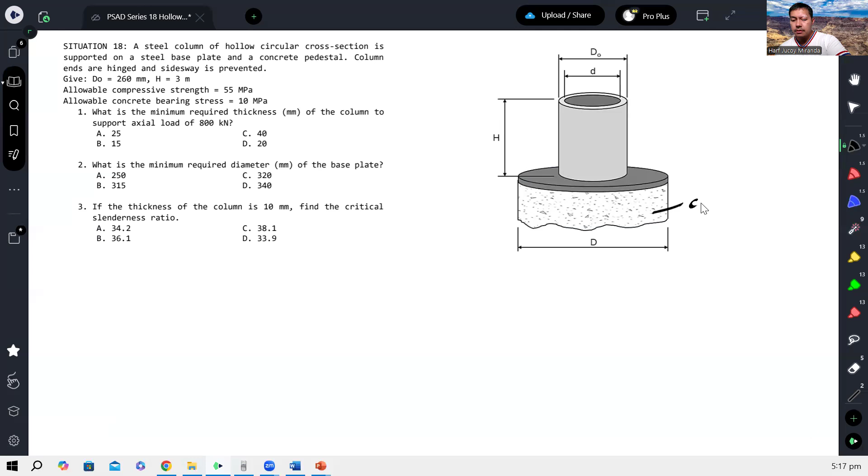Now, as you can see in the figure, it turns out this is the base plate, nakapatong siya sa concrete pedestal. Nasa concrete ito. And ito yung base plate.

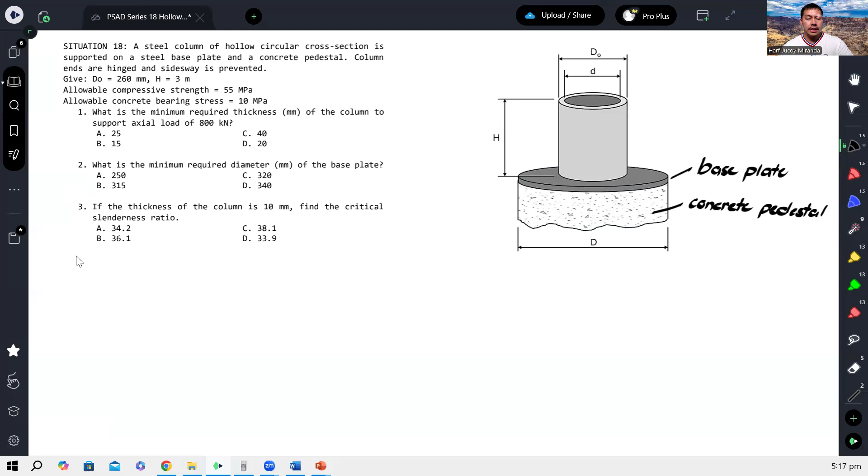So, first question: what is the minimum required thickness in millimeters of the column to support an axial load of 800 kilonewton? So for number one, basic lang to na normal stress.

Kapag nag-apply ka ng load na equal sa 800 kilonewton, ano daw yung required na thickness? As you can see in the cross-section, ang cross-section na kukontra dun sa force is ito, dahil hollow siya. So how do you calculate for that area?

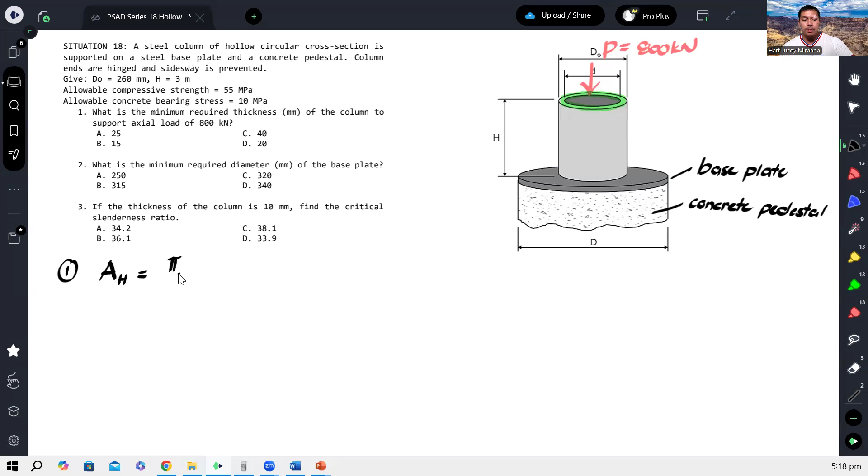Yung area ng hollow section is basically yung area ng buong circle, tapos ibabawas natin yung area ng inner circle. Kung tatawagin natin yung diameter ng inner circle na small letter d, ang magiging area niya would be pi over 4 times the outer diameter squared minus the inner diameter squared. Kumbaga, area ng malaking circle minus area ng maliit na circle.

From our simple stresses, ang axial stress will be equal to force divided by area. In this case, yung area is yung hollow section, na kasi yung kumokontra dun sa force.

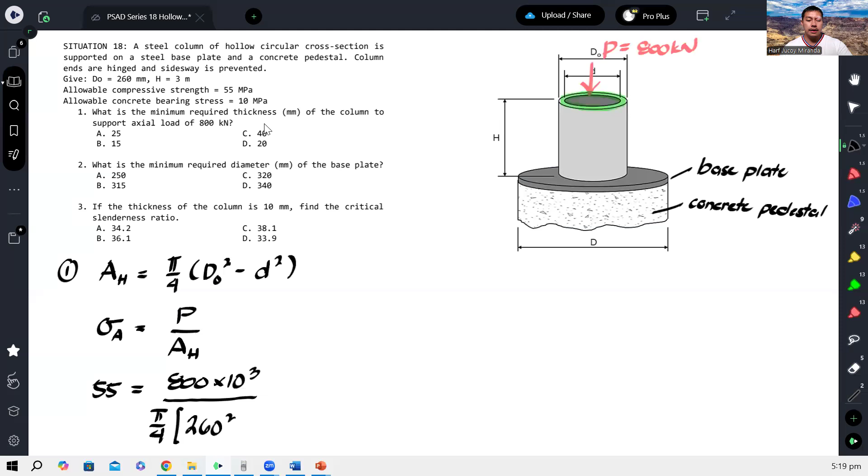If we would plug in the values, ang allowable stress natin ay 55, and the applied force is 800 kilonewton. Gawin natin newton para same unit sa megapascal mamaya. Over pi over 4, the outer diameter is known to be 260 squared, given naman. Pero we don't know the inner diameter.

Pwede dito na i-solve mo yung inner diameter muna bago yung thickness. Meron din namang option na masosolve mo kagad yung thickness. Pero para lang simple, computin na lang muna natin yung inner diameter. Okay, so pag sinolve natin yan,

we will have, cross multiply ko na lang: 260 squared minus inner diameter squared, equals 800,000. So our diameter here will be in terms of millimeters, which gives us 221.54 millimeters.

221.54 millimeters. But that's not the question. Ang question sa atin, ano daw yung required thickness? So kung titignan natin yung cross-section natin, i-exaggerate lang natin yung thickness. Ganyan siya, bali ito yung outer diameter na 260.

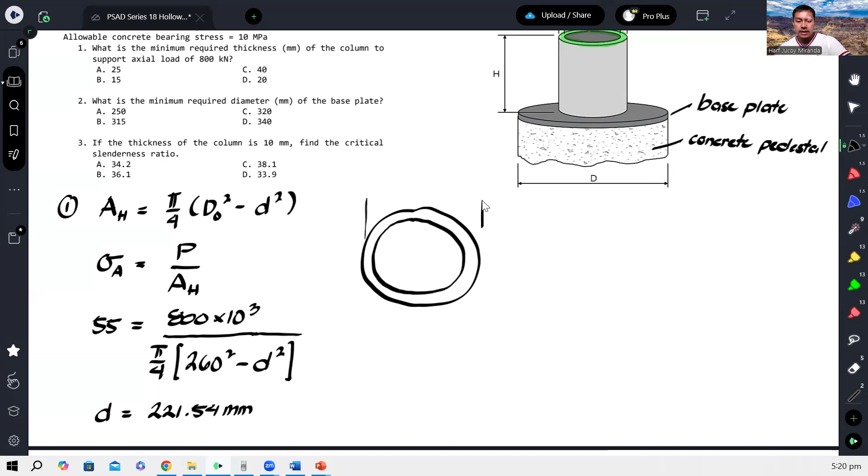Tapos, ang na-solve natin ito, which is 221. Lumalabas, ito nga yung thickness natin, at ganun din sa kabila. At as you can see, pag pinag-add natin yung dalawang thickness at yung inner diameter, dapat equal yun sa 260.

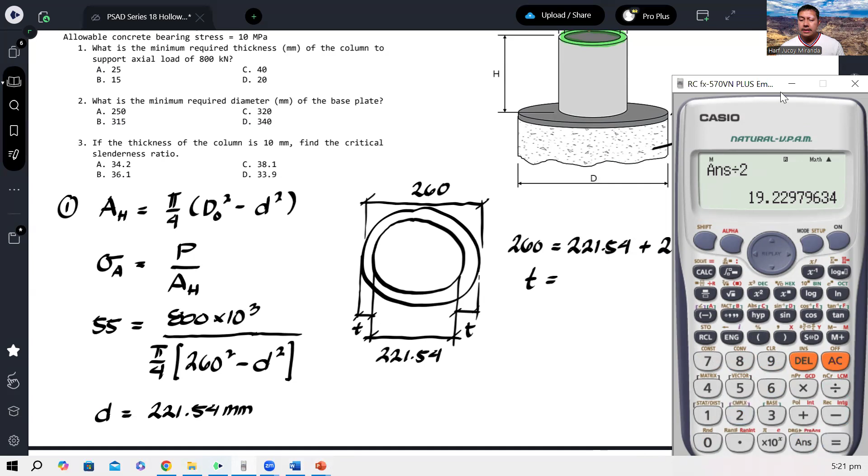So therefore, 260 is equal to 221.54 plus dalawang thickness. Therefore, we can solve for the thickness, which gives us 260 minus yung sagot natin, plus divide lang ng 2, so that would give us 19.23 millimeters. Ang required natin na thickness syempre dapat higher than this, kumbaga minimum ito, so we can round this up to 20 millimeters.

Okay, so that will be our answer for number 1.

Testing lang natin. Alternatively, yung area ng hollow section can also be calculated as pi times the mean diameter times thickness. So ano ibig sabihin yan?

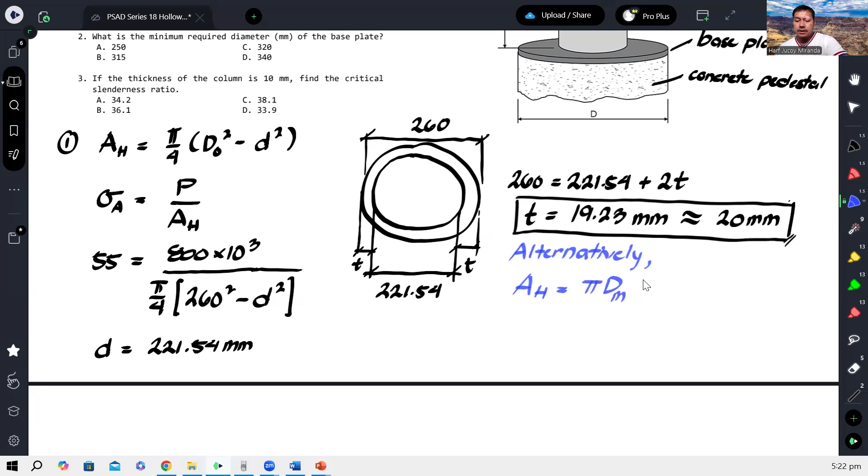Ang ibig sabihin, kung ito yung cross-section natin, pwede na ang i-define mo na diameter is yung mean diameter. Ibig sabihin yung diameter kapag nag-drawing ka ng center line dun sa cross-section niya. So ito yung mean diameter.

And the idea with this formula is, kapag kinat mo to, tapos nilatag mo, binuka mo, no? So pagka kinat mo siya diyan, at binuka mo yan, ang mangyayari etong part na to, lagyan natin ng kulay or marker. Bali etong part na to, mapupunta dito pag binuka. Ayan, pag binuka natin siya, maging ganyan siya.

Kumbaga ito, yung dulong yan, ito yun. Okay, tapos itong kabilang dulo, itong nasa kabilang side, ito naman yun. Okay, so hopefully na-imagine, medyo mahirap ipaliwanag sa online. Pero yun yung idea, no, na yung kahabaan na to, yung kahabaan na yan is, pakita ko lang dito, yung haba na to is yun din yung haba na to.

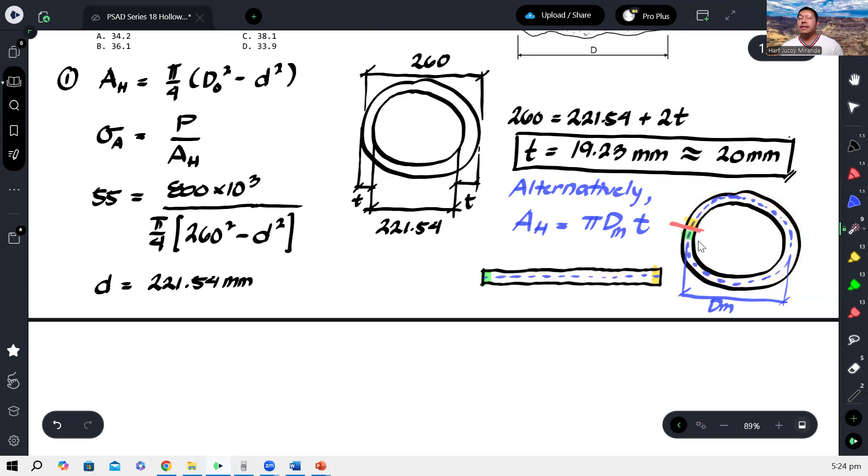Okay? So ibig sabihin, circumference lang to ng circle. Kaya lumalabas, that is just pi times the mean diameter. Tapos ano to? Hindi ba yan ay kung ano to? Which is also the thickness. So thickness ito. Kaya naipakita natin dito na yung area natin dito is also equal to the base times height, which is pi diameter times thickness.

Well, kung ganyan yung gagawin natin, so by the way, this is only applicable for thin-walled vessel sections. Ibig sabihin, yung thickness niya compared dun sa dimension is relatively small. Okay? And based sa choices, medyo maliliit na yung thickness compared dun sa diameter na 260, kaya pwede na rin itong i-assume as thin-walled section.

At kapag ginawa natin yan, so ito na ngayon yung continuation. So ganoon ulit, stress is equal to force over area. So yung area ko is ito, pi times mean diameter times thickness. Kaya lang, ano yung mean diameter?

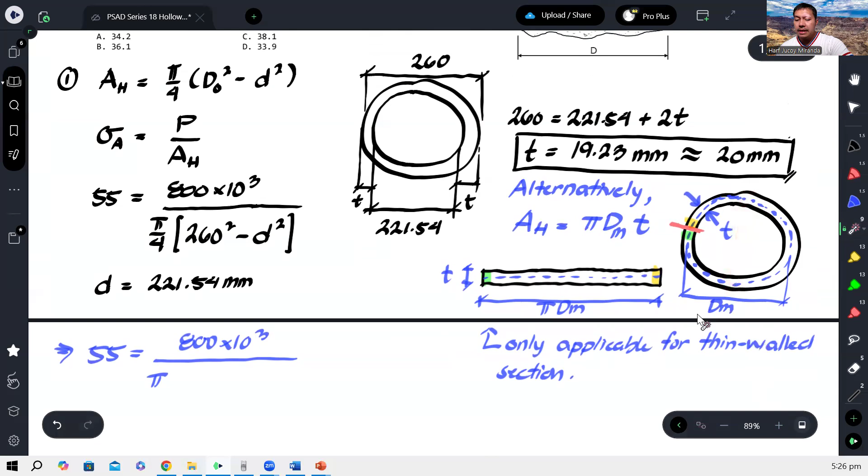So kung titingnan natin dito sa drawing, yung mean diameter, take note, hindi yan yung 260. Ang 260 kasi is mula dito sa pinakalabas hanggang dito sa pinakalabas. Pero yung mean kasi nasa gitna na loob tapos another gitna na loob. So basically, yung mean diameter is just the outer diameter minus yung kalahati ng thickness sa kabilang side minus kalahati ng thickness sa kabilang side.

So all in all, parang ano lang yan, 260 minus thickness. Okay? So ibig sabihin, yung mean diameter natin is 260 minus thickness, times thickness. And dito, ang masosolve kagad natin is yung thickness.

So, pwede na merong konting discrepancy, masosolve natin dito ha, kasi ina-assume natin dito sa alternative solution natin na thin-walled section yung cross-section ng hollow cylinder.

So, we have X. So, kinos multiply ko lang equals 800,000. Okay, um, quadratic kasi ito, kaya dalawa yung roots niyan. So, nakuha ko yung unang malaki. Pero, gawin ko shift solve.

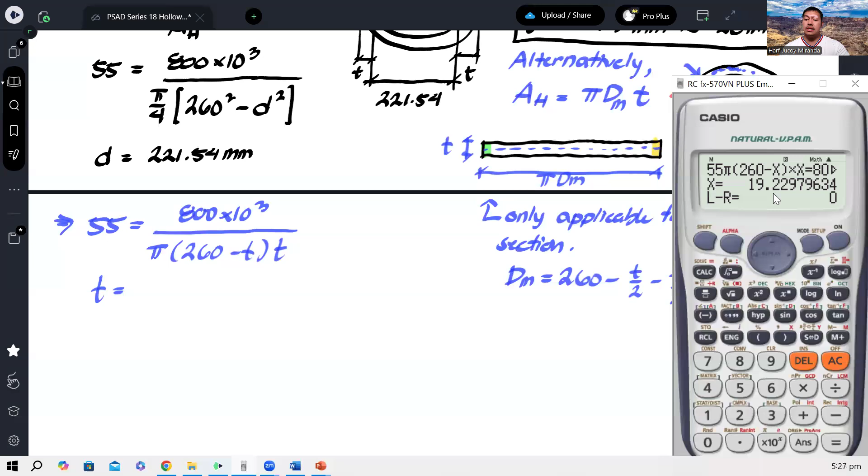Data natin, gawin natin 5. Ayan. So, makukuha naman natin yung other root, which is, as you can see, malapit na malapit doon sa na-compute natin, 19.23 millimeters. Okay, and likewise, you can round this up to 20 millimeters. So, same lang yung sagot.

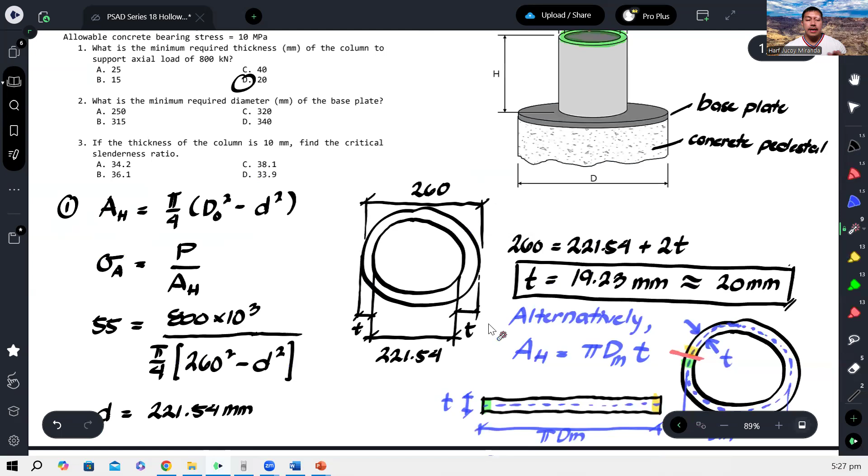Okay, kaya lang may limitation itong formulang to ha, pang thin-walled na section lang yan. So ibig sabihin kapag relatively makapal na yung section, hindi na to pwedeng i-apply. Magkakaroon na ng mas malaking error. Ayan, so alternative lang yun. Pero of course, if you nakasanayan nyo to, wala namang problema.

Okay, let's have number 2. What is the minimum required diameter of the base plate? So, ngayon naman, ano daw yung kailangan natin na diameter ng base plate? Saan ba magbabase yun? So, in reality, magbabase yun dun sa bearing pressure na kailangan niyang kargahin.

Kasi di ba ang idea, kapag mas maliit yung contact area, tapos meron kang force na i-apply, mas malaki yung stress nun. Pero kapag yung contact area mo malaki, kahit na i-apply mo for the same force, the pressure or the stress will be smaller. Okay? Kasi inversely proportional yung stress dun sa area.

Okay? Kaya ibig sabihin, gusto niyang tinatanong sa atin, ano ba yung karapat-dapat na diameter nung base plate nang sa ganon, yung bearing stress ng concrete at ng steel ay hindi ma-exceed yung limit.

May binigay dito na limit. Kailangan nating malaman ngayon ano yung diameter.

Take note, yung diameter ng base plate ang magsasabi kung ano yung contact area. Kasi sa actual, pwedeng mas malaki yung concrete pedestal, pwedeng mas malaki pa. Pero regardless kung gaano kalaki yung concrete, kung yung pinatong na base plate ay hindi ganoon kalaki, maliit lang, ang mangyayari mako-concentrate yung stress doon sa area kung saan lang sila merong contact.

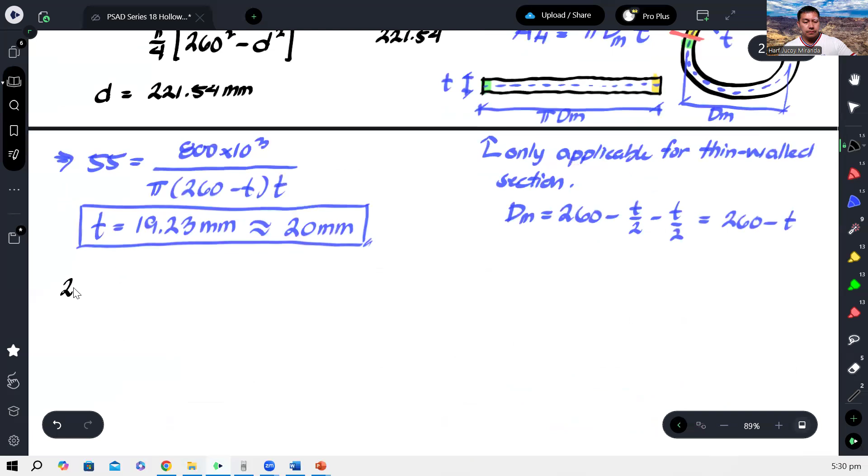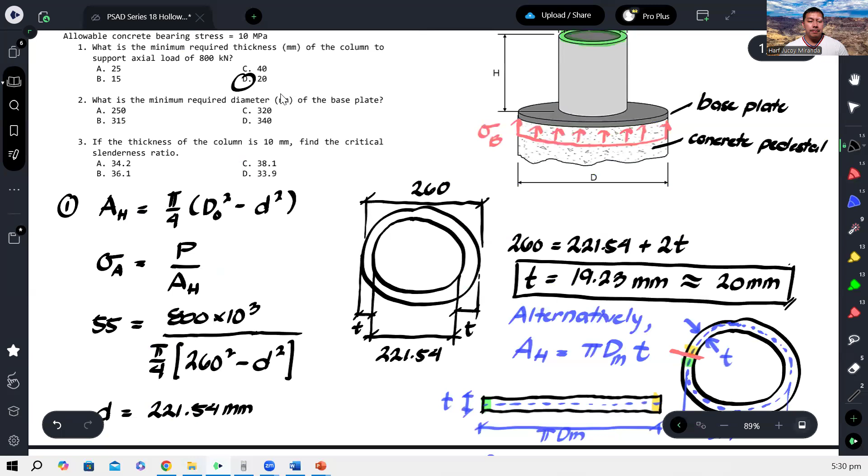Ang bearing stress ay katumbas ng force hinati sa area of contact o bearing area. Ang binigay na allowable bearing stress ay 10 megapascal. So lagay natin dito, 10 equals 800,000, yung in-apply na force.

Hinati sa contact area. Ang contact area ay yung area lang ng base plate kasi yun yung tatapak doon sa concrete pedestal. So pi over 4 times d, assuming na d yung diameter ng base plate, squared.

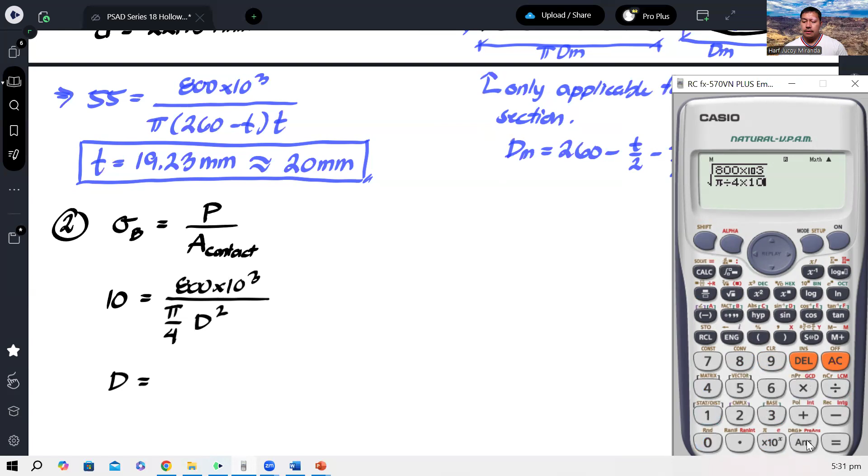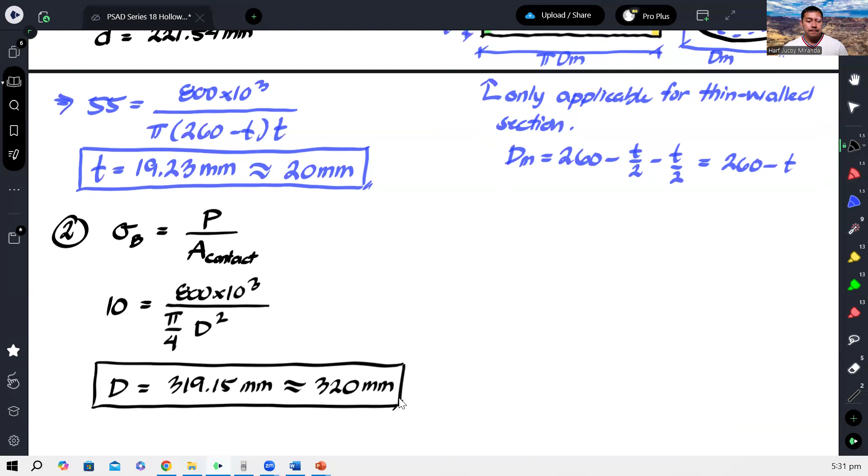At mula dito, masosolve natin ang required diameter. Iyan ay square root ng 800,000 divided by pi over 4 times 10. At nagbibigay sa atin ng 319.15 millimeters, na pwede nating i-round up to 320 millimeters, na magiging sagot natin para sa number 2.

Round up, hindi round down, kasi ang goal natin mapalaki yung area para malessen ang stress.

Ngayon, number 3, kung ang thickness ng column ay 10 millimeters, hanapin naman ang critical slenderness ratio. Ang slenderness ratio ay may kinalaman sa height. Ang given na height ay 3 meters.

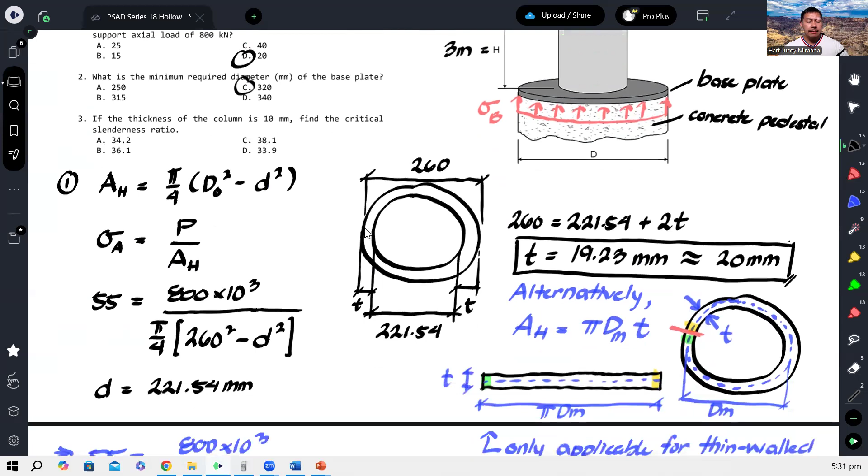Kailangan natin makompute sa number 3 ang slenderness ratio, na KL over R. Kailangan ko ng radius of gyration. Para makompute ang radius of gyration, square root yan ng I over A, kailangan natin ng I.

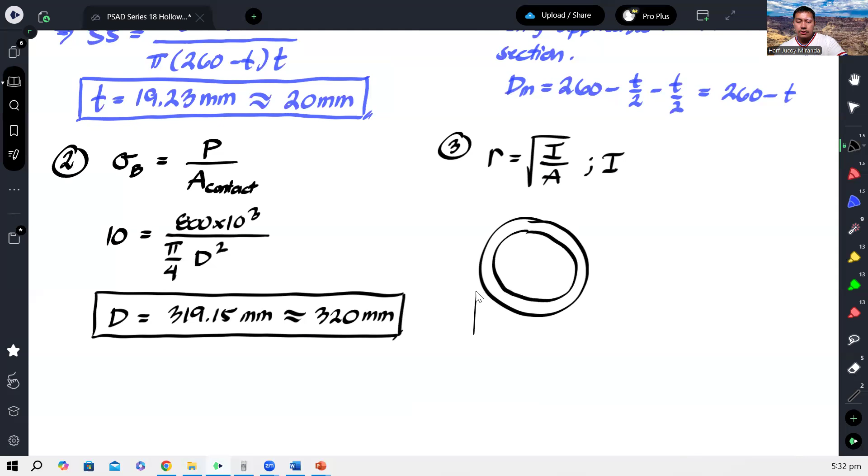Sinabi niya na ang thickness ay 10. Kung ito ulit yung cross-section natin, ito yung 260 pa rin. Kaya lumalabas na yung inner diameter ay 260 minus dalawang 10, kasi 10 ito at 10 din ito. So 260 minus 20, that's 240.

Samakatuwid, ang moment of inertia ng hollow section, dahil ang moment of inertia ng circle ay pi over 64 diameter to the fourth, ay magiging pi over 64 times yung outer diameter to the fourth minus inner diameter to the fourth. Iyan ang moment of inertia natin.

Para naman sa area, iyan ay pi over 4 times outer diameter squared minus inner diameter squared. Mula dito, makakalkula na natin ang radius of gyration.

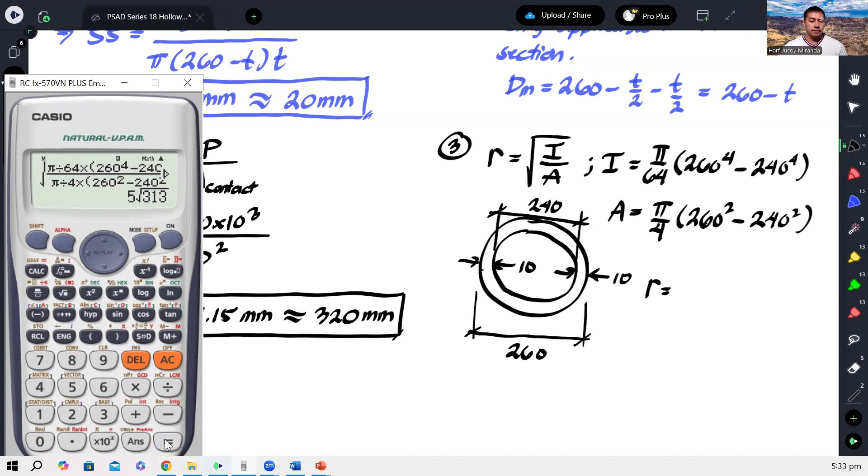Diretsahin ko na: square root ng I natin, na pi over 64 times 260 to the fourth minus 240 to the fourth, over area, na pi over 4 times 260 squared minus 240 squared. Nagbibigay sa atin ng 88.46 millimeters.

Samakatuwid, ang slenderness ratio natin, na KL over R, dahil sinabi sa problema na ang ends ay hinge and sideways prevented, kapag ganyan ang K natin ay 1. Ang length ng column ay 3 meters over yung R na nasolve natin.

Samakatuwid, ang slenderness ratio natin ay 33.91.

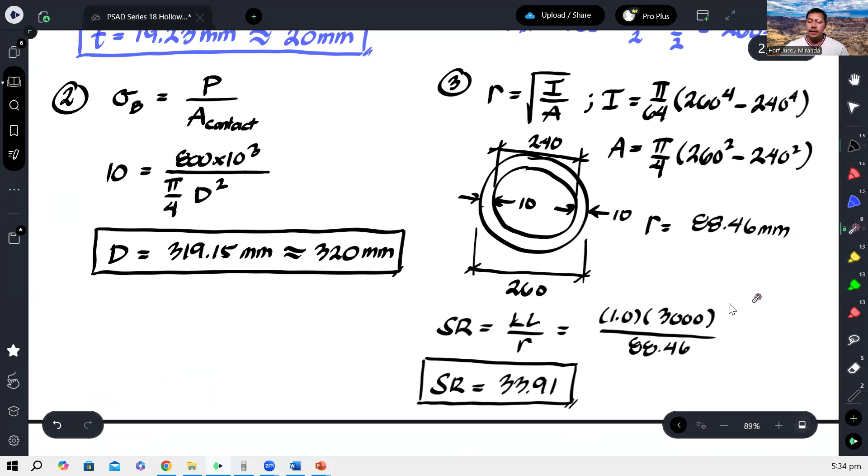Ang slenderness ratio ay walang units, kasi ang length na ito ay same units doon sa R na ito, kaya magkakansel lang sila. At samakatuwid, ang sagot natin para sa number 3 ay letter D.